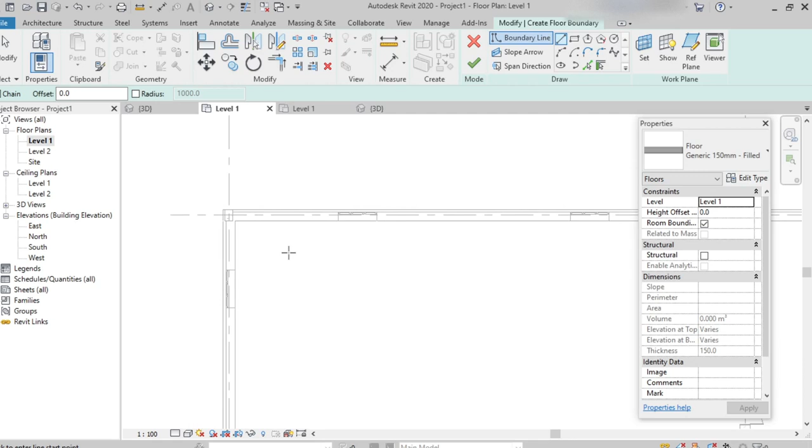So after selecting the floor type, now we'll see how we can create it with the help of line. I'm selecting the line option. So from where we want to create a floor - I want to create from the exterior face of the wall. So I'm picking the end point of the wall and the next end point. In the same way we'll be creating a closed profile by picking all end points.

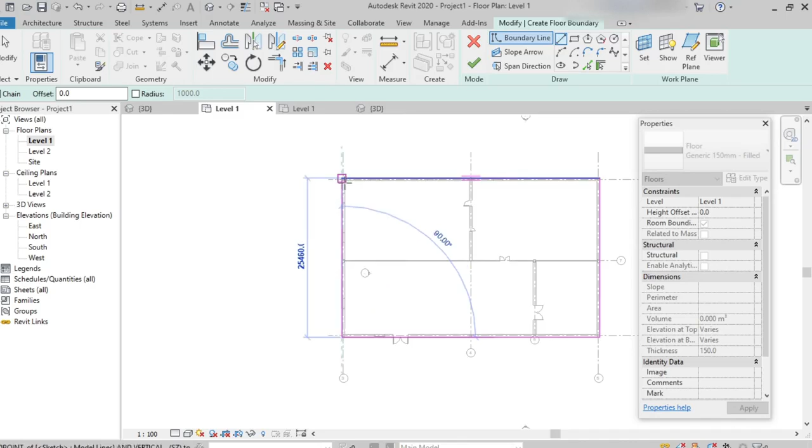So when we are creating a profile or sketch, it should be a single closed profile with no intersections or openings. With the help of line we can pick the endpoints and create a floor, and we have other options. In the same way we can create with the help of rectangle also by picking the two endpoints. We can use this pick wall method also. So this way, it's best practice to create the floor.

So here I'm giving Ctrl Z. Now from draw tools I'm using the pick wall method, and here we can give the offset value where we want to create the balcony or create an extra space behind the walls.

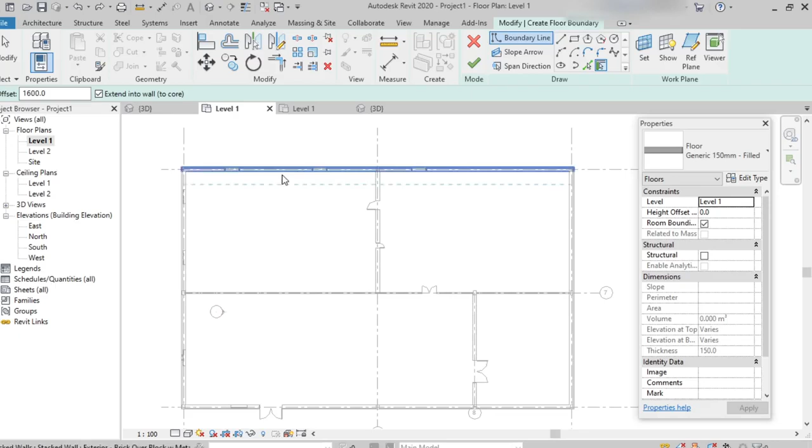There we can use this offset value. Here I'm taking 1600 offset value, and when I place the cursor we can see a blue dashed line. If we pick inside, it will create the floor only inside the walls, but I want extra space behind the walls. So no need to pick interior walls to create the floor, only exterior boundary walls are enough. So I'm picking all boundary walls.

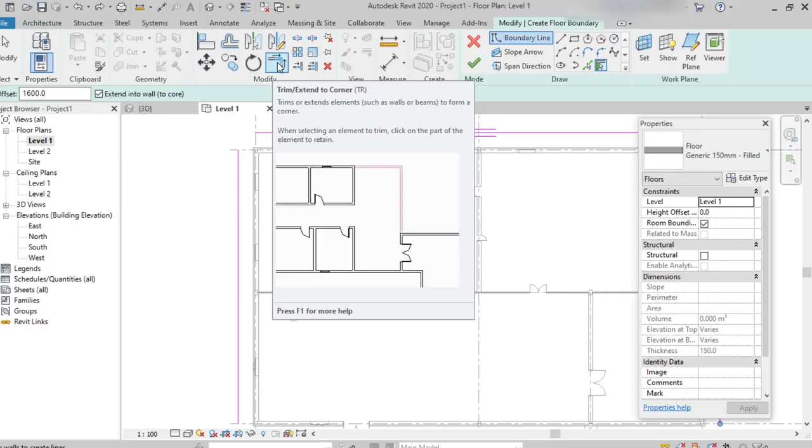So after picking, here we can see there is an opening on four ends. We can make it closed. From modify tools, here we can use this option called trim or extend. Select both the lines, and here we can see how it got extended. In the same way we can apply it to the other sides. So now it has been created as a single closed profile.

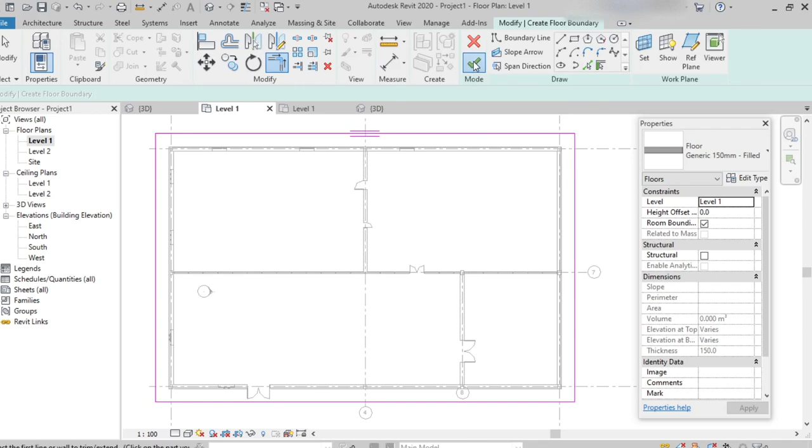After creating, click on finish. Here we can see a floor has been created. From the view control bar we can set it to realistic. Here we can see a floor has been created. In 3D view also we can view that. This is the floor which we have created.

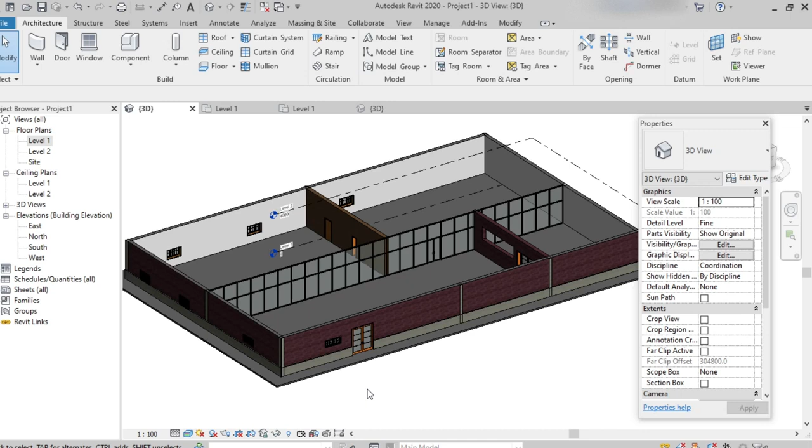Now after creating the floor, we can edit the properties of the floor like thickness or material. Before creating also we can edit, or after creating also we can edit. Select that particular floor from the properties palette. Here we can see edit type, then structure edit, and the thickness of the floor. Either we can increase or decrease it.

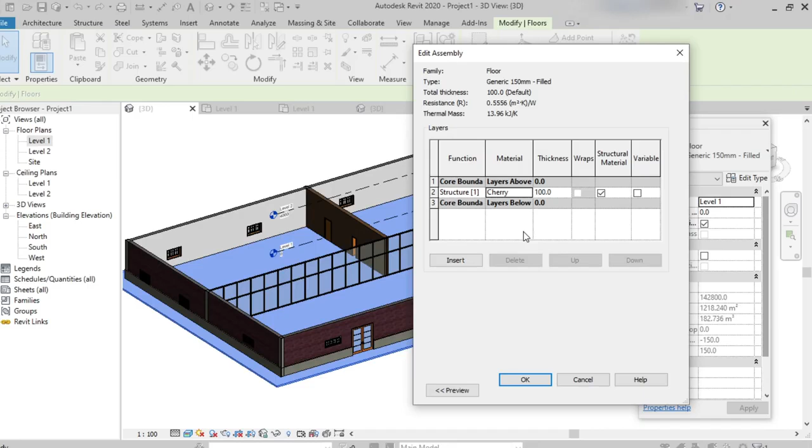So here I am making it 100 mm, and the material here by category - click on that. I am selecting cherry, then click OK. Here we can see the material cherry and the thickness 100. Then click OK, apply, OK. Here we can see how the material has been changed to cherry and the thickness has been decreased to 100 mm.

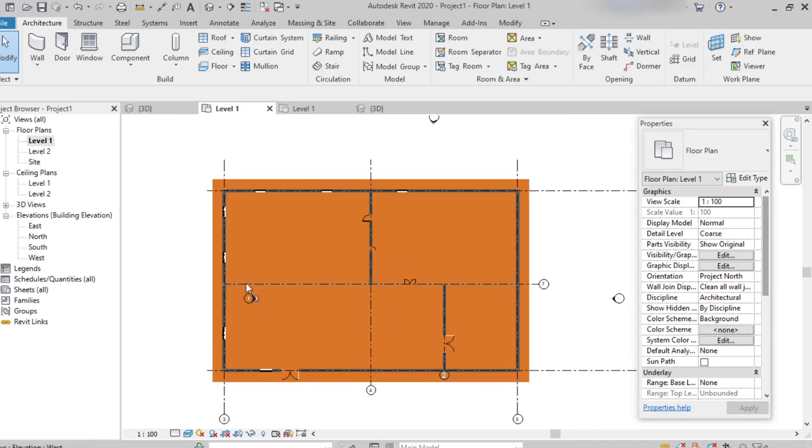So in this way, we'll be creating the floor and editing the properties of the floor. Thank you.